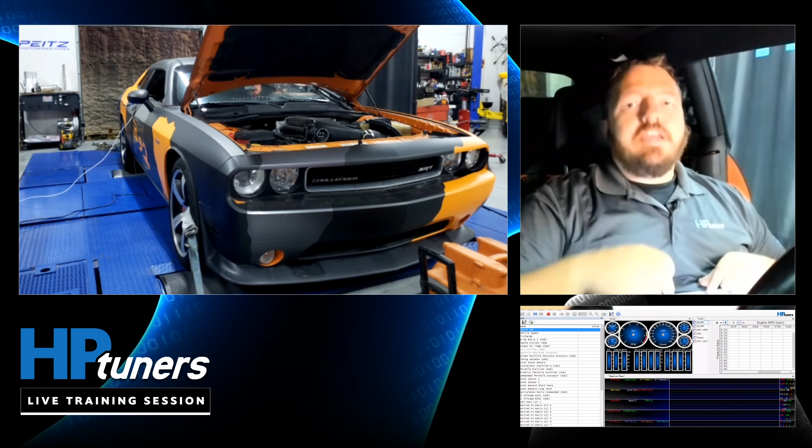All right. So like I said, we are sitting inside of a 2012 Dodge Challenger SRT8. To give you a little more information, again, it is still 6.4-liter. We have not put a different crankshaft. It is a stock crank, but it is fitted with Manley pistons, Manley rods, and the Whipple supercharger. It's making about 7 pounds of boost right now. It's on 93 octane. It also has long tube headers, if I'm not mistaken. And we also have an overdrive pulley on the lower and also a slightly smaller upper pulley as well.

So it makes pretty good power. We're gonna see what it makes right now. It's gonna be pretty cool. So let's get going on it. So first things first, we're already on the dyno. We're already strapped down. We're ready to go. I've got the VCM scanner opened up on my screen, which you guys should be able to see here. And also I have the dyno set up. I've got the customer's information inputted into the dyno already.

I've also already set the RPM. We are using RPM from wheel speed. So I let the converter lock. I put it in 3rd gear. This is a NAG1. This is not an 8-speed. So it's a 5-speed transmission. I typically do the pulls in 3rd gear as opposed to 4th, just to keep the load down and keep the length of the pull, not as short as possible, but shorter so we're not just lugging the engine a bunch. So just keep that in mind.

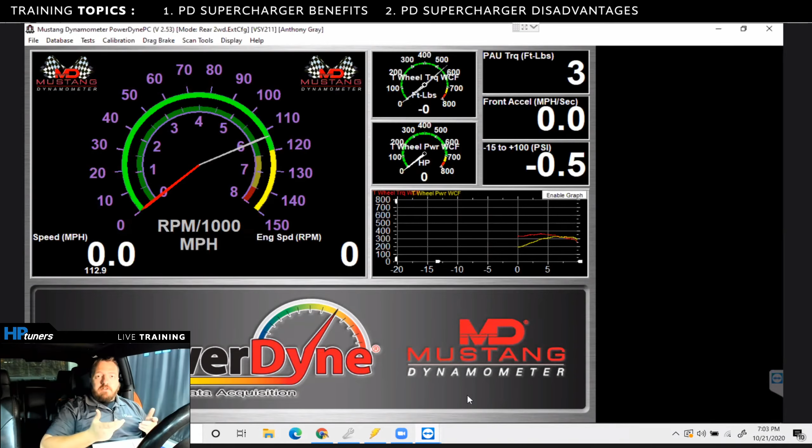So let's go to the dyno software. So let's pull it up here. In case you guys don't know, I do have a Mustang Dyno MD800. It is an all-wheel drive dyno. We're just in 2-wheel drive right now. It does have dual eddy current brakes. So we have PowerDyne opened up, and now we're going to go to our test, and we're going to go to performance. We're going to set that to power curve.

Okay, so this is where we set our sampling RPM window. So we're going to start sampling at 3,000 RPM, and we're going to end sampling at, let's say 6,400, actually 6,300, just in case. So we could go higher, but I'm just trying to do this for demonstration purposes right now. This car actually makes pretty good power, even at higher RPM. So just keep that in mind. All right, so we got that set.

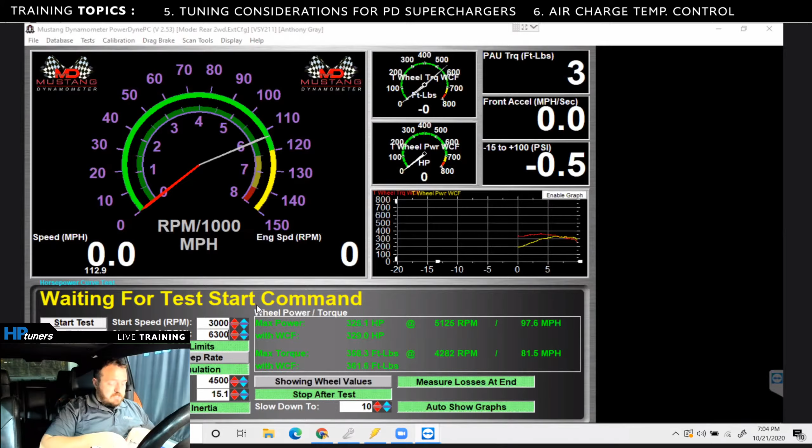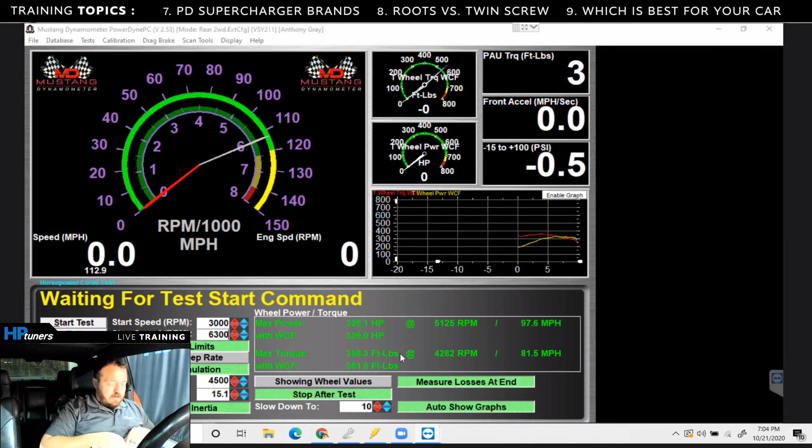You want to make sure that you have simulated inertia active. And let's see here. We have simulated inertia active, vehicle simulation on, RPM limits are on. So we should be ready to rock and roll, guys. All right, so now we're going to go back to the VCM scanner. And first things first, we're going to do 2 presses on the button to go to ignition mode for run. Then we're going to connect to vehicle.

And I'm using my Dodge channel config.

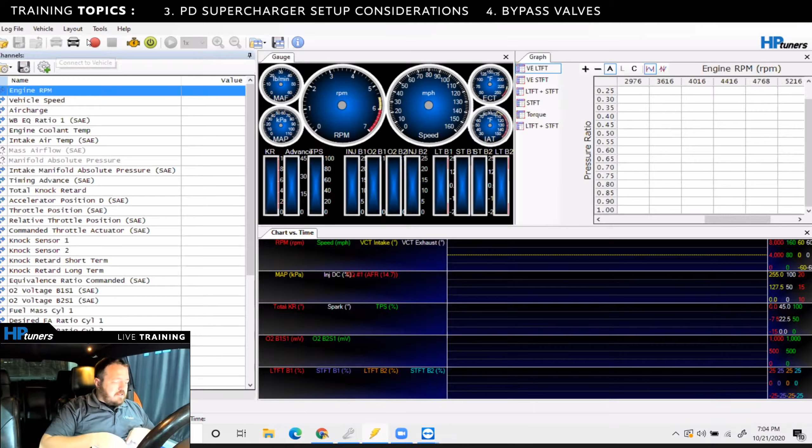All right, so we are connected, and now we're going to click Start Scanning. All right, so we're getting data. Everything's looking correct. Coolant temp's 165. IAT just sitting here is 136. That will go down as we do the pull, actually, because we just have stagnant air right now where it's reading that. We are reading AFR via an AEM wideband, which is going into the CAN.

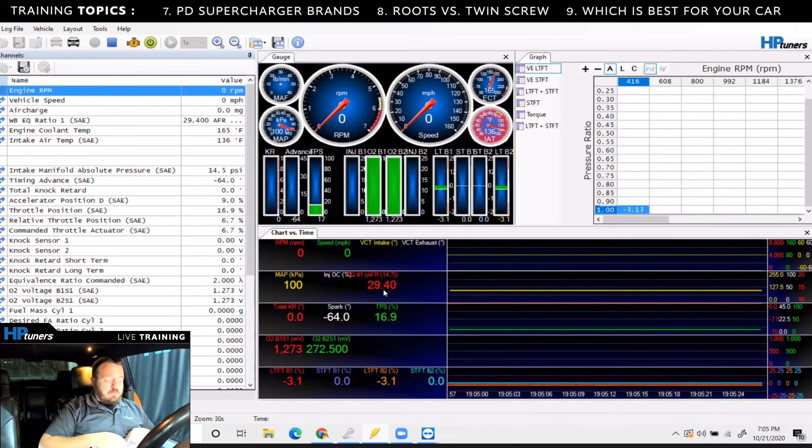So it works pretty well. It's very quick. You know, there's all kinds of other widebands out there you guys can use, but this is just the easiest for demonstration purposes, and it works really well. So nonetheless, let's go ahead and fire it up, and let's do a pull. So give it a second here, kind of idle down.

And the wideband is in the tailpipe, so it reads a little bit leaner right now because we're not getting as good of an exhaust signal at the tail. But once we get into wide open throttle, it's pretty much the same as if you were in the collector. It'll read slightly leaner, but if you tune for the leaner mixture all the time, it's all relative basically. So we'll be all good, just in case you guys are wondering why it reads so lean.

In that scenario, if you do have the wideband in the tailpipe, what you really want to focus on is your primary O2 sensors. They're oscillating properly. So that means that we are bouncing right there between 14 and 15 parts air to 1 part fuel. And our fuel trims are pretty good. It oscillates a little bit, changes a little bit as it heats up. But our fuel trims, you know, we want to be plus or minus 5% if possible on the long term. Short term will vary some.

All right, so we should be ready to go here. So we're going to go ahead and get rocking on it. All right, so get back to the dyno screen. All right, actually, we're going to keep you guys in the VCM scanner so you guys can look at that. All right, that was fun. Had a little kick to it there. All right.

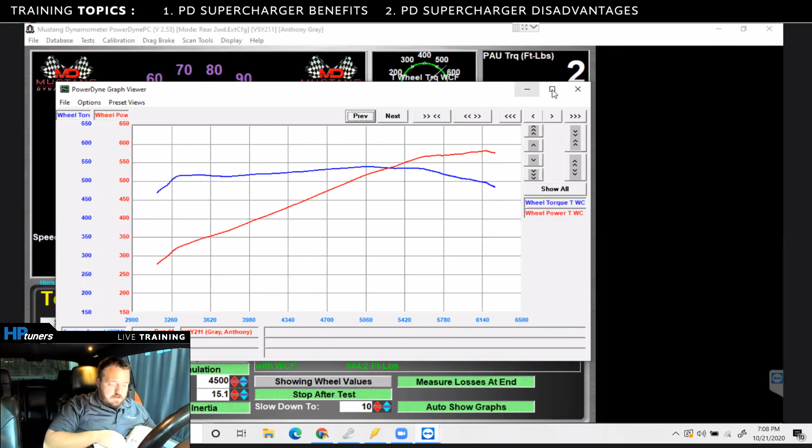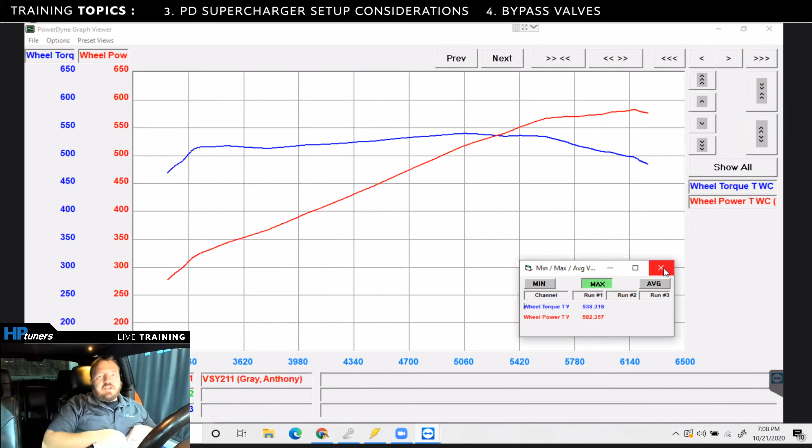All right, so it looks like 582 horsepower and 540 pound-foot of torque. Just to give you guys a little bit of reference on this, a stock 392 on my dyno makes about 395 horsepower, especially the NAG1 ones. Sometimes they'll make a little bit less. Again, we are in third gear as well. We're making about 6 pounds of boost right now. So we're not trying to turn the earth with this particular combo.

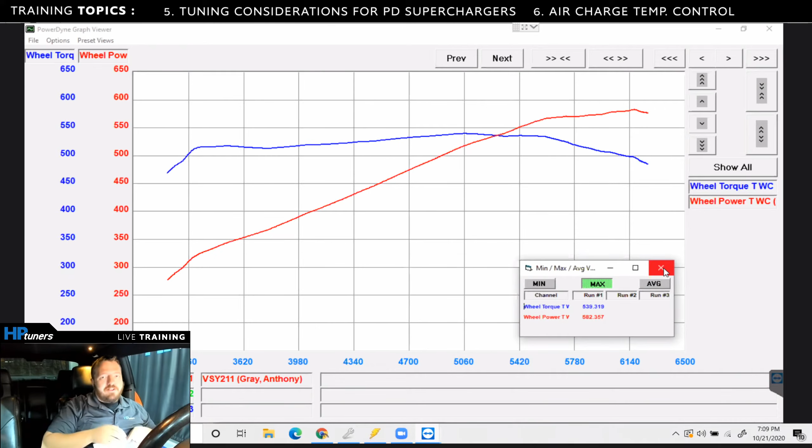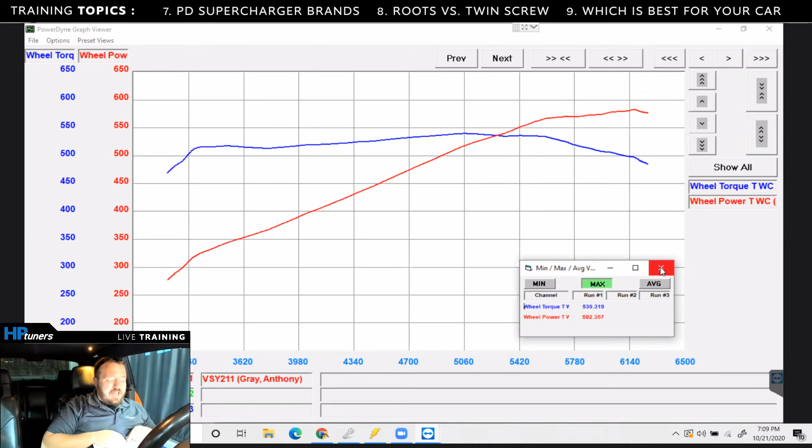Once we put E85 to it, it picks up like 100 horsepower. But this is just kind of a getting around street daily tune, if you will. So not really putting the screws to it, so to speak. But yeah, good, reliable horsepower. Couldn't ask for a better looking graph. It looks pretty good, and everything's looking good.

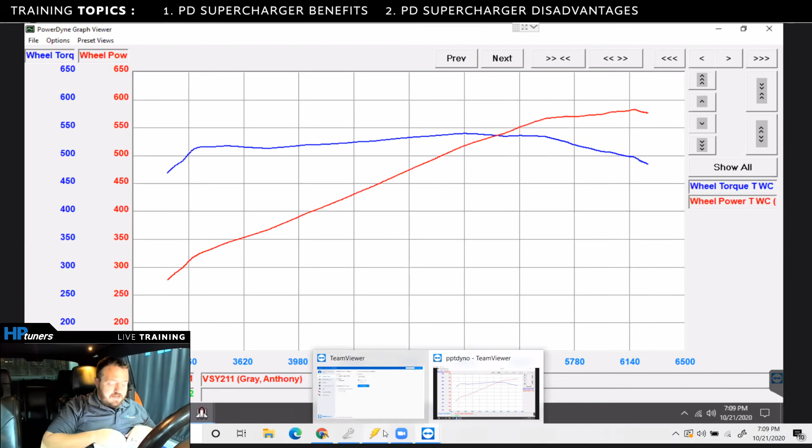So we're gonna come back to this when we talk about the tuning considerations for PD blowers. I just want to get you guys started off with a bit of a bang, get you excited about this, and we'll come back to it. All right, so now we're actually going to discuss the benefits of PD blowers, and we'll go from there. So first and foremost, what is a PD blower? Well, that just means a positive displacement supercharger or a positive displacement blower. And that's typically a blower which sits atop the motor and takes place of the intake manifold, so to speak.

So within that, you have different types of PD blowers, of course, which we will discuss here later on. But generally speaking, the PD blower is going to be extremely helpful because anytime that you can put compressed air or boost into your motor, you're going to introduce more oxygen and more air charge and higher cylinder pressure, which typically will generate more power. Of course, when you do that, you have to account for that with additional fuel, which we'll discuss a little bit later on in the seminar.

However, that's the biggest advantage. Obviously, we're going to make more power because we're packing airflow into our engine, which is also awesome, right? So can't go wrong with that. Now, some other advantages of a PD blower versus maybe a centrifugal supercharger is the fact that you're going to generate boost right off the bat. Right when you go wide open throttle and that bypass valve shuts, you're going to be making boost, which means you're going to be making torque right off the line.

And as long as you can manage that torque and actually generate traction and not just wheel spin, you're going to go a lot faster. The acceleration rate's going to be much greater and it's going to be awesome. But the issue is managing that and being able to get traction. So then you really put a lot more load on your suspension and everything else and chassis tuning of the vehicle. So there's a lot of things you have to take into account. So sometimes in certain applications, it may be better to use a centrifugal supercharger or a turbo or whatever it may be. But again, a PD blower is going to give you many benefits. Also, it looks pretty cool under the hood.

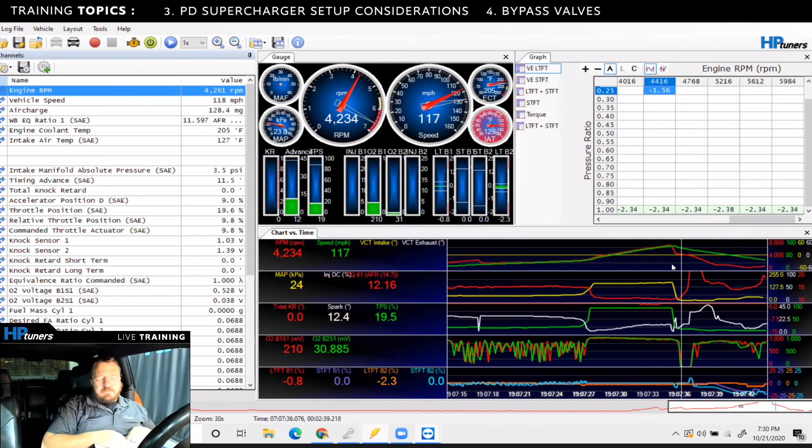So if we didn't have that bypass valve there, your RPM would have surged up and kept climbing. And it could be potentially dangerous, not only for your engine, but for you as a driver. So the bypass valve is extremely important in mitigating those issues. So just keep that in mind as well. So that's pretty much the main gist of what I wanted to discuss with bypass valves.

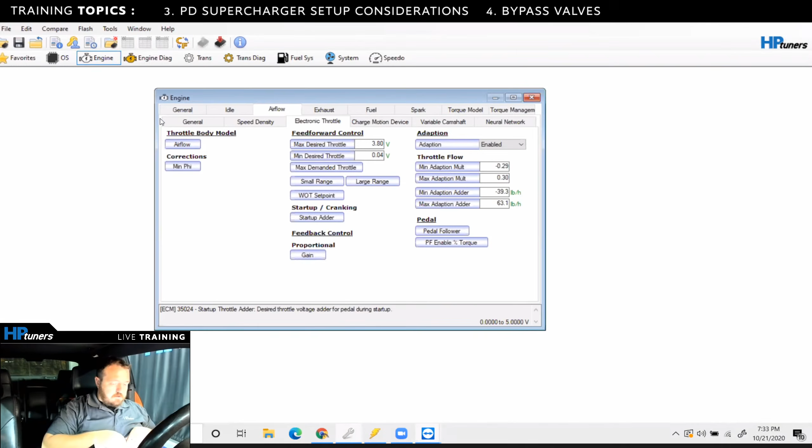I'm going to go to the tune file real quick so you guys can see kind of what my spark map looks like. All right. Make sure we're on the right one. It's a 2012 Dodge Challenger SRT8 6.4 liter. Just in case you guys don't know how to do that, again, you go to Edit, Tune Details, and that will tell you the year, make, model, and the VIN of what you're working with.

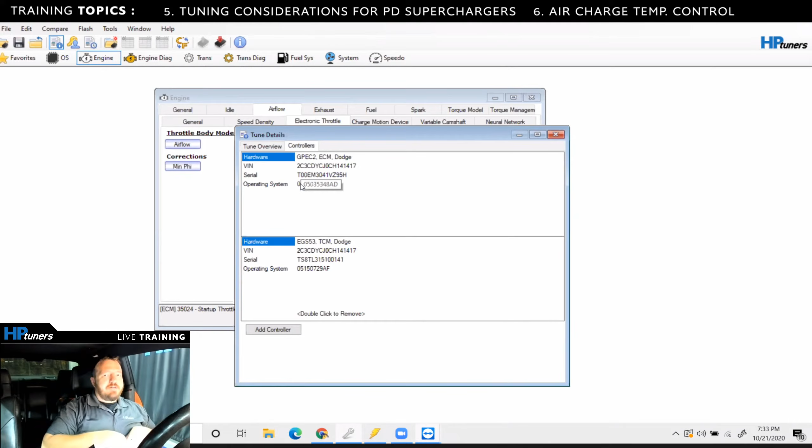Also, if you go to Controllers, you're going to see the hardware you're working with, the serial number, and the operating system ID, which is extremely helpful in certain situations. Also, we have our TCM, our Transmission Control Module. We have our serial and operating system from that. You can also add controllers as well if need be. Some pretty cool features there.

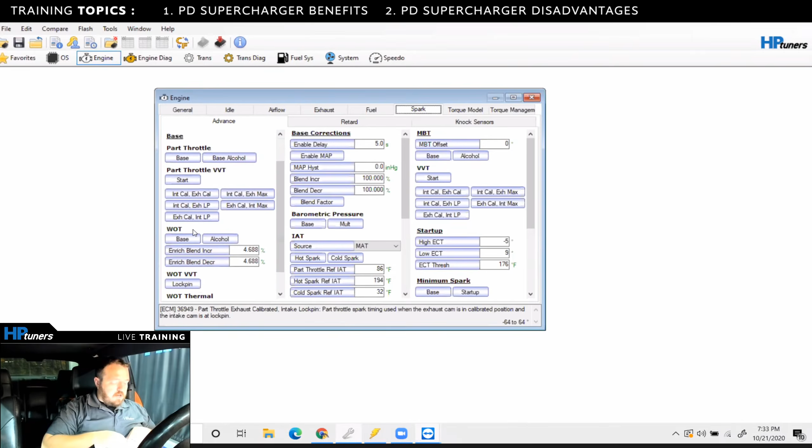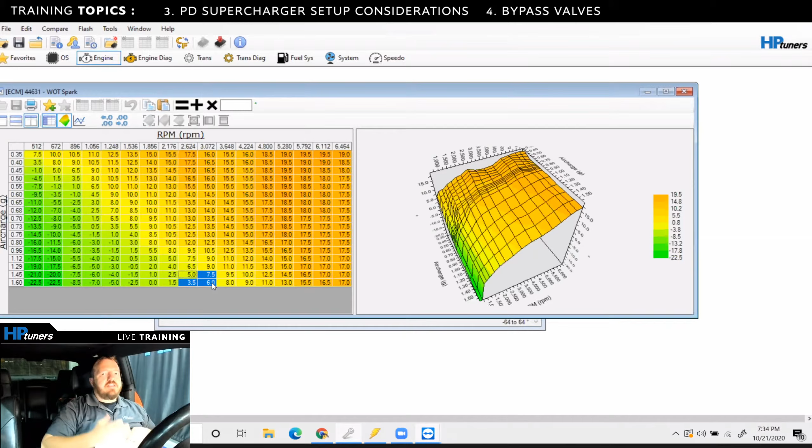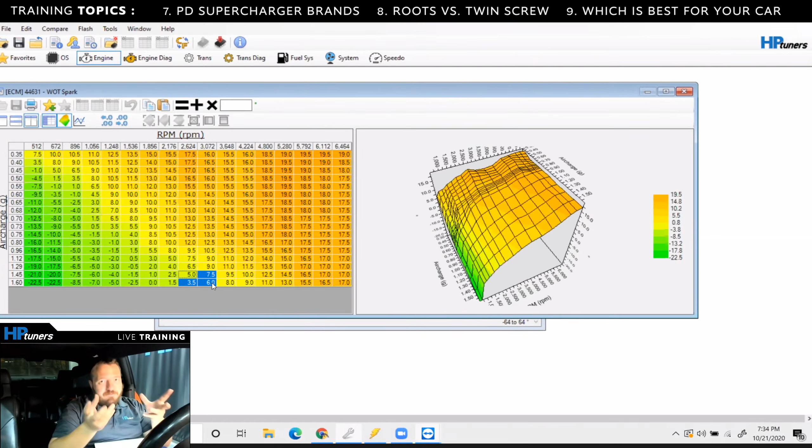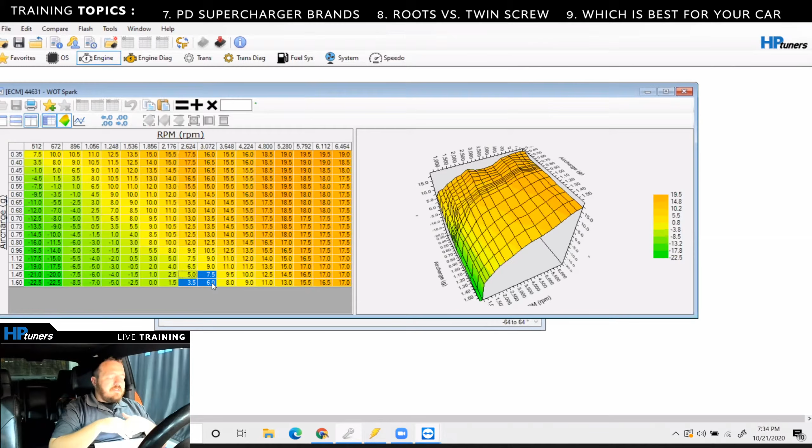Now, this engine is a little bit lower compression because it is a built motor, so it can take some more timing. Also, in addition to that, we have our cam in here. So that cam has more overlap. It has more duration. And so it's going to relieve some of the cylinder pressure back into the intake as well, because you're going to have a little bit of reversion going on there. So the dynamic compression is going to be lower as well. So the lower the static, the lower the dynamic compression, the more timing we typically have to put into it to see ideal combustion. However, this is going to vary from application to application. This is just an example, right?

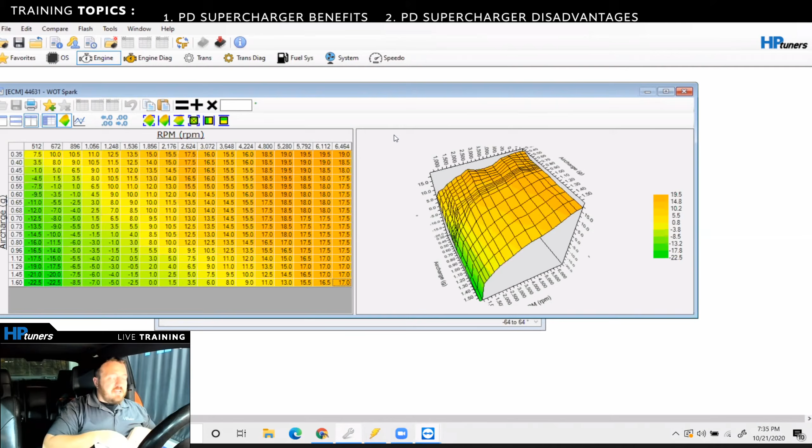So as RPM increases, our efficiency decreases, and therefore we need to advance timing. Now, this is 17 degrees on the very top end at 6,400 RPM. You'll never actually see that because we have an IAT Spark Modifier, which comes in and reduces that actual timing substantially in higher IATs, which in a scenario like we have here, you're going to have higher IATs typically because it's a supercharger and your air charge temperatures are going to be higher.

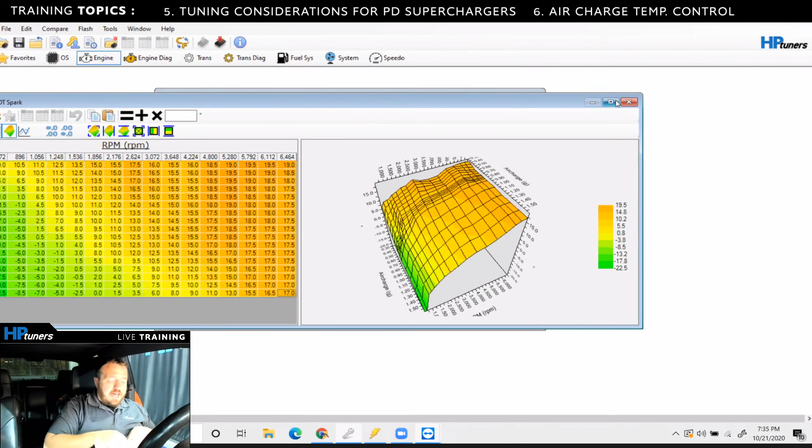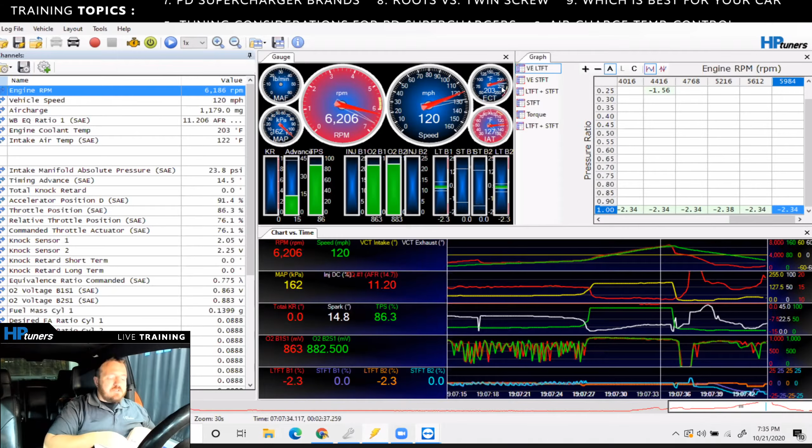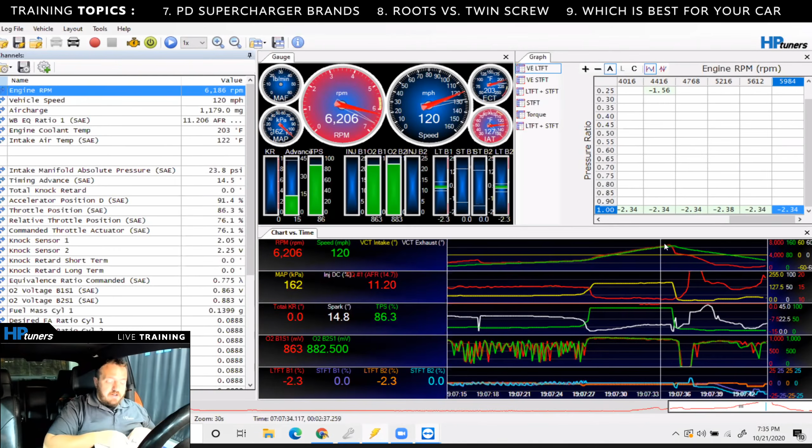So actual timing at the end of the pull, now we're not bad IATs here. So our actual timing was 14.8 degrees. We only have 127 degrees IAT, but our coolant temp is about 203. So it's a little bit cooler run than what you're typically going to see on the street. So on the street, you may see 130, 140 degree IAT, depending on the ambient conditions, and your actual timing value is going to be lower and lower and lower. So your base spark values sometimes need to be a little bit higher to account for that loss in timing you'll see with higher intake air temperatures.

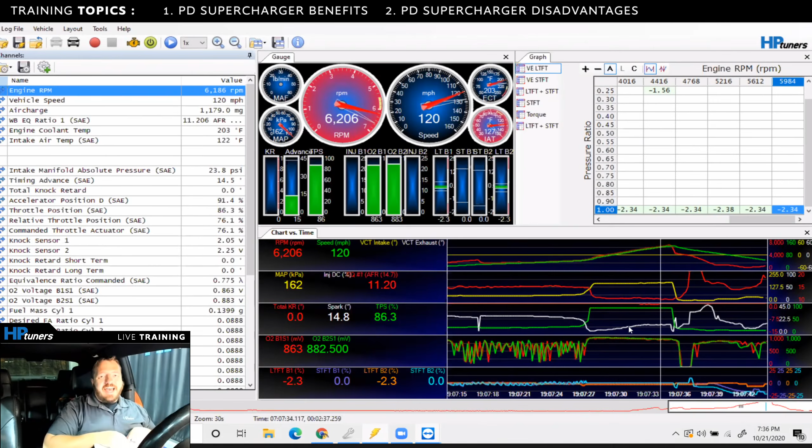Now, there also is an IAT Spark Modifier table, which you can adjust. So if we go back to the tune file, and we go to Spark, we go to Advanced, and we go to our IAT Hot Spark table, it sees the IAT Hot Spark reference is 194 degrees.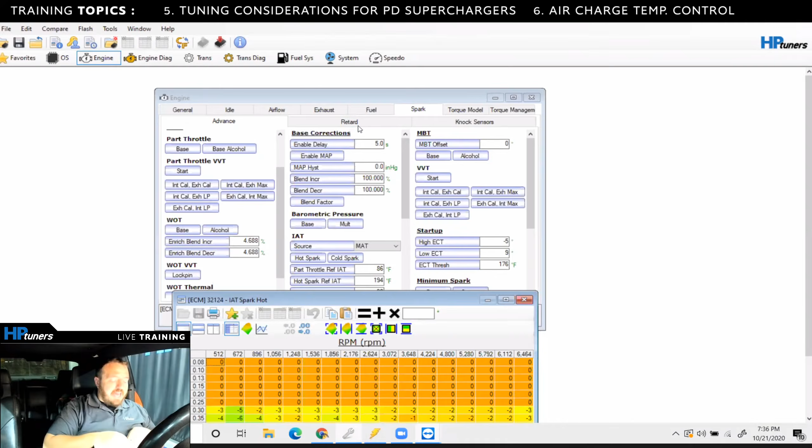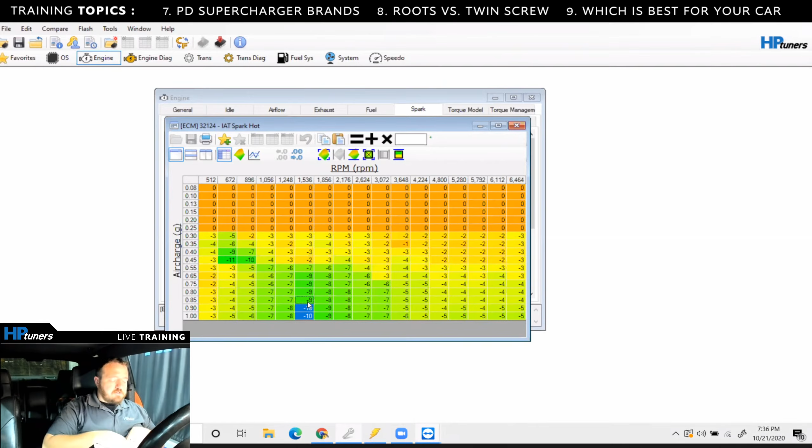So this is the maximum amount of timing it can retard if it sees 194 degrees of intake air temperature. So at 2100 RPM, you guys notice actually our higher amounts of spark retard are in the lower RPM ranges. Again, that's because of low speed pre-ignition potential, and we want to mitigate those issues as much as possible with our tune. And so that's why those values are more negative at lower RPM, because higher load, lower RPM equals the danger zone for us with a PD supercharger, right?

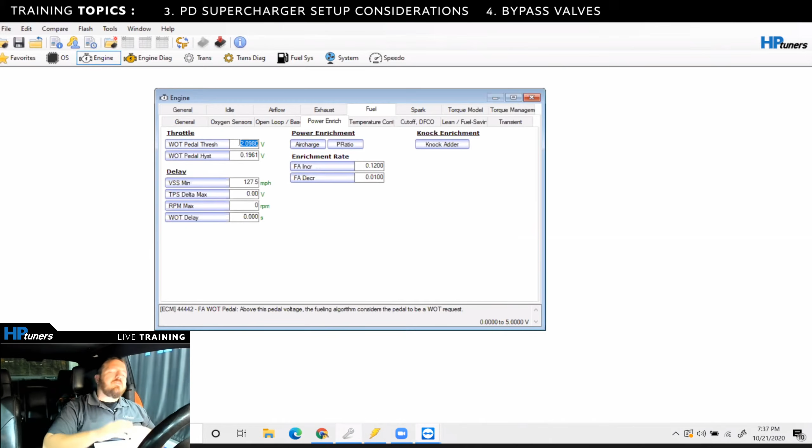So number one thing to think about when you're tuning for a PD blower car is that low speed pre-ignition issue. In addition to that, you'll see, go in power enrich, we can knock our pedal threshold for voltage pretty low. Factory is about 3.7 or 3.5 volts, or something like that. And so I've got all the way down to 2 volts. So I don't want that to come into play. Basically, after I exceed 2 volts on the pedal, 0 being nothing, 5 volts being everything, after I exceed 2 volts and then other thresholds that are involved in the tune, then it goes into power enrichment. Or FAPE on this Dodge.

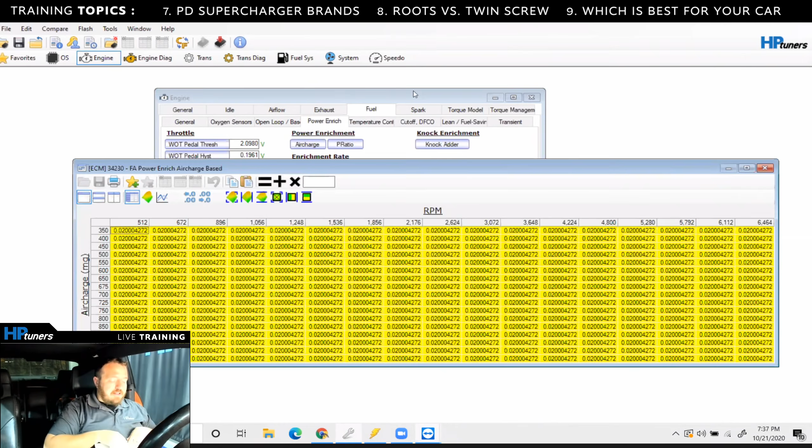So once it exceeds that voltage threshold, then it's going to add this value, which this is fuel air ratio, not air fuel ratio. So it takes this value and adds it to this value. This is our fuel air stoic, right? So to convert that to air fuel, so you can see what I mean, go 1 divided by 0.0688 equals 14.53. Right, so that is the air fuel stoic for this particular application.

Now that is accounting for some ethanol content. But if we're thinking about this in terms of air fuel equivalent of 1 lambda, it's still going to be 14.7, but it's scaled about 3% because it was accounting for 3% of ethanol when they did the original calibration. So don't let that confuse you though. It's all good, right? So take 14.53 divided by 14.7, because that's our reference, because our wideband is spitting out air fuel ratio equivalents of 1 lambda. So we're getting it back to our language, so to speak, our dialect, if you will.

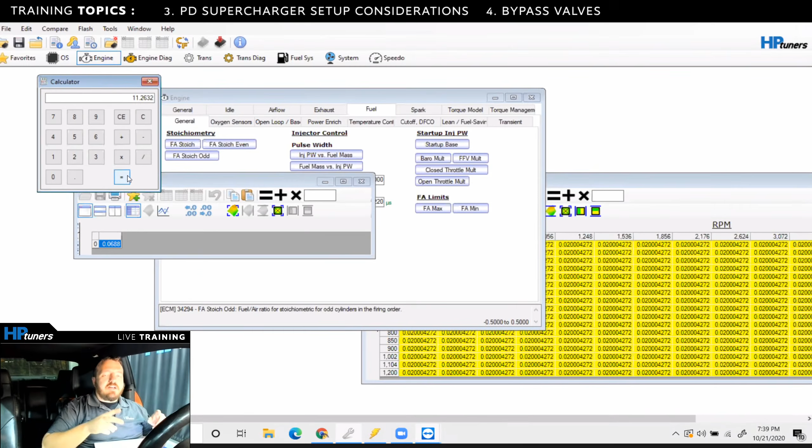So that equals 0.988. So that's basically a correction factor you can apply to your desired air fuel ratio at wide open throttle. So if our desired air fuel ratio at wide open throttle is 11.4, we need to take 11.4, multiply that by 0.988 to give us our desired air fuel ratio for this particular application, right? So 11.4 times 0.988 equals 11.26. So that is what I call our corrected desired air fuel ratio.

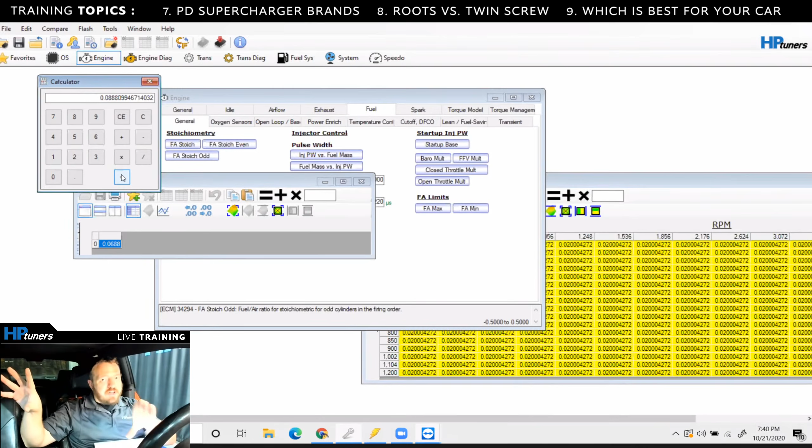So now that we have that value, we need to convert that back to fuel air, right? So 1 divided by 11.26. That's going to equal 0.08880, basically. So now we have that desired fuel air ratio at wide open throttle. And now to figure out what we need to put in our FAPE table, which is an adder to our FA stoic, we need to subtract the FA stoic. So subtract 0.0688, that equals 0.020000, right?

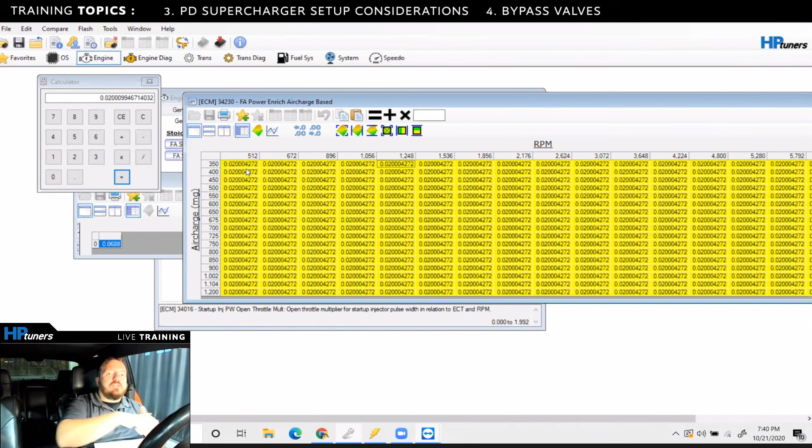So going to our FAPE table, we are commanding 0.020004272. So we are commanding 11.4 parts air to 1 part fuel once we exceed our wide open throttle pedal threshold of 2 volts amongst the other thresholds that are set in the tune. So just wanted to show you guys kind of how that worked on a Dodge, right? Because Dodge is different, right?

So moving forward here, before I move forward, does anybody have any other questions on this? I know we just talked about a lot, and I just threw a lot at you, so please.

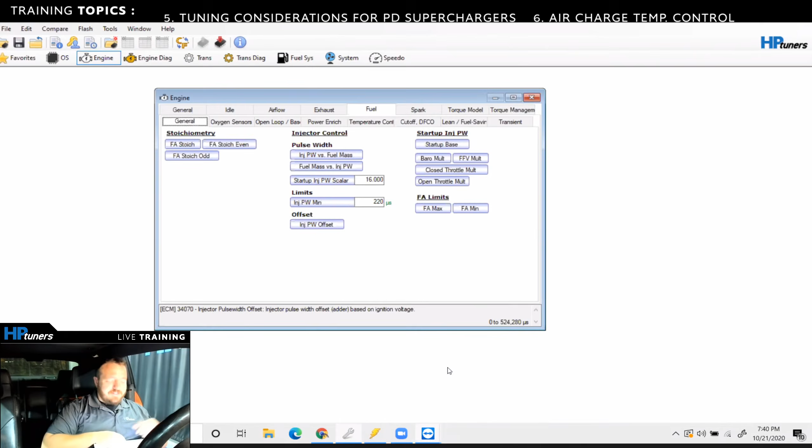All right, so somebody had a question about a general RPM that you look for to avoid LSPI or ways to mitigate low speed pre-ignition or LSPI in reference to RPM. So typically, it's going to depend engine to engine, of course, because your peak torque of your engine is going to have a pretty good bearing on that. So, yeah, it's because the cam profile, everything goes into account.

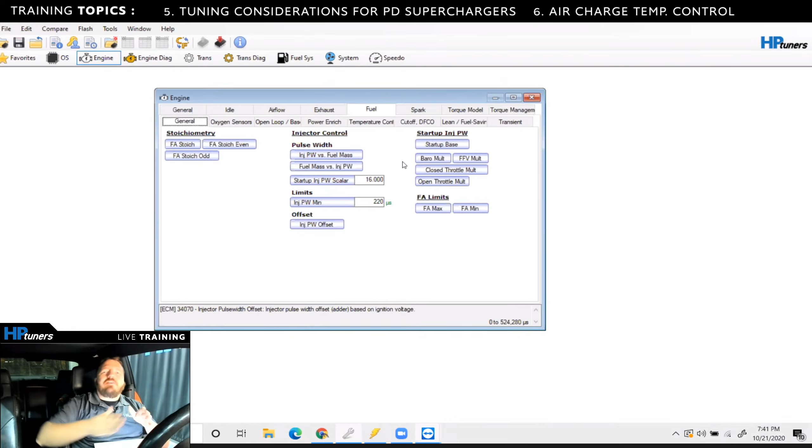But generally speaking, anything after 3,500 RPM or so on a Hemi, at least, you're going to be kind of out of that danger zone. You'll start to see the spark advance start to scale back up after that point. So really, it's like idle to 3,000 RPM and 80 to 150 or higher percent load. That's really your danger zone for LSPI specifically.

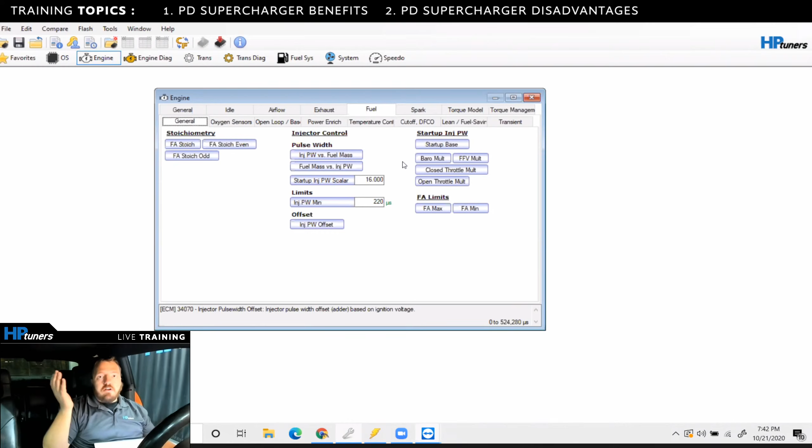However, you could see it in other scenarios as well, depending on the engine, because some engines may make peak torque later on, or they may have higher RPM ranges, and so on and so forth. But the thing about the PD blower is we're making peak torque everywhere, right? So it's always a concern, but it's even more of a concern in those lower RPM ranges.

So hopefully that helps answer your question somewhat. And please let me know.

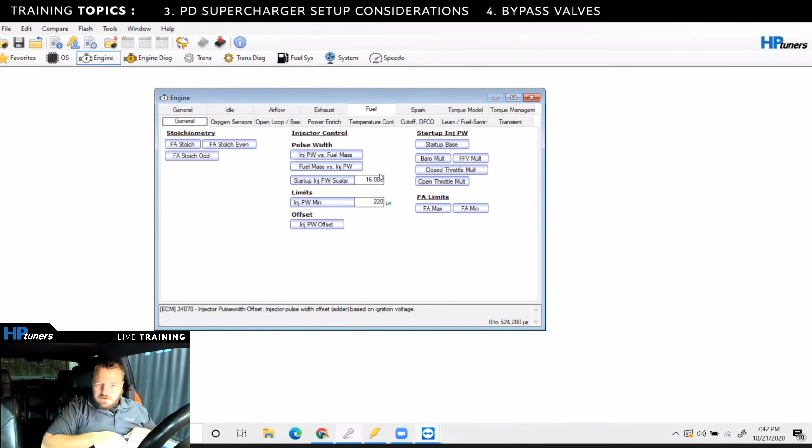All right, so moving on, guys. So keeping air charge temperatures in check. We've really talked a lot about this already, but again, the intercooler brick, improving that as much as we can, having more capacity as well. So you may have your stock offering from different supercharger companies. Now, to improve that, you can make a bigger heat exchanger, do a different intercooler design, but that's going to be really in depth and require a lot of R&D.

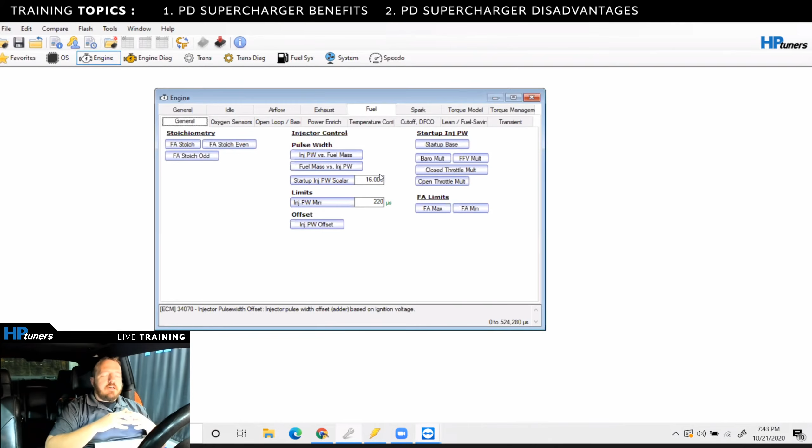The initial install on those type of systems is kind of in depth, especially if you haven't done it before. But once you have it, they do work pretty well. I mean, granted, we saw this in the Demon as well with their particular system. So even OEMs are adopting this type of method. But the thing is, once you go wide open throttle, it's going to shut off the AC compressor. So you are relying on your AC compressor to do its job. So once you go wide open throttle, you may not have the AC compressor working anymore. So you are going to see a higher air charge temperature at wide open throttle.

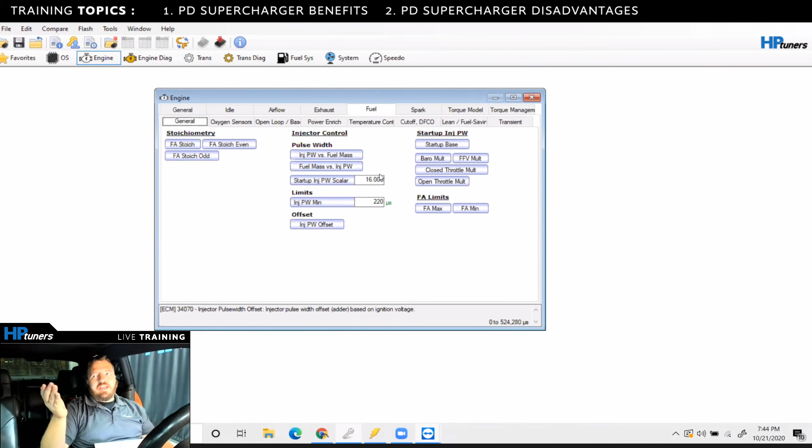However, if you're starting the pull or your run or whatever it may be at 40 degrees intake air temperature and it raises to 70 or 80, maybe 90 or 100 at the end of the pull, that's still extremely low in reference to starting a run at 130 degrees IAT. So just keep that in mind.

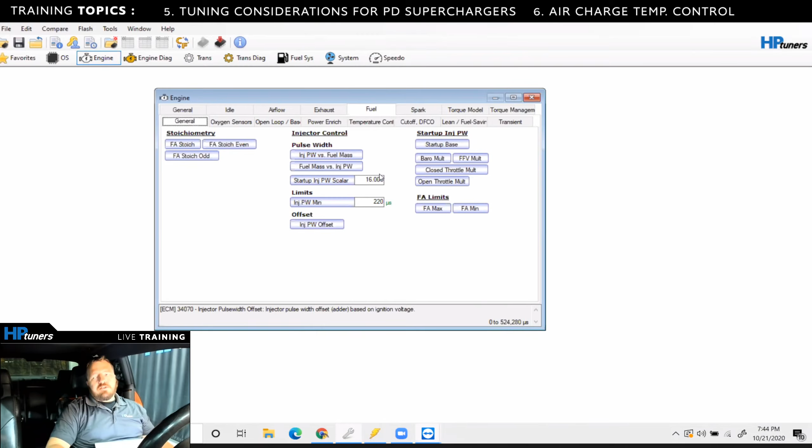The ice box works really well, but you do have to run lines. You have to run a separate reservoir, usually in the trunk. So there are some things involved there. You got to run an extra pump. You gotta kick on that pump. There's some more wiring. But the ice boxes work really well. They do add some weight, and if you're road racing, you may not want that weight. So there's just other things to consider there. But keeping the air charge temperatures in check is extremely important.

One other method you can use is methanol injection. Methanol injection in the air charge will cool the air charge considerably, but you have to be careful because you need to wire that meth system properly. And a properly wired and properly controlled meth system works really, really well. However, you do have to fill up the meth. It's a separate container you do have to fill. So there are some considerations there for a street application; your customer may not want to do that. So they might not be open to that particular method, but it is a viable solution to cooling the air charge temperatures. So hopefully that helps you guys out with that specifically. Any questions on that?

All right. So brands of PD superchargers. There's a lot of different brands out there, and all of them have their benefits and advantages over others. And we're not set on one specific brand here. At Peitz Performance, for example, we sell Whipple, we sell Magnuson, we sell Harrop, we sell many different types of PD blowers, and they all serve their purpose for a particular customer. And some of them offer different things for different cars that others may not offer. So they all have their place in our awesome aftermarket world and family.